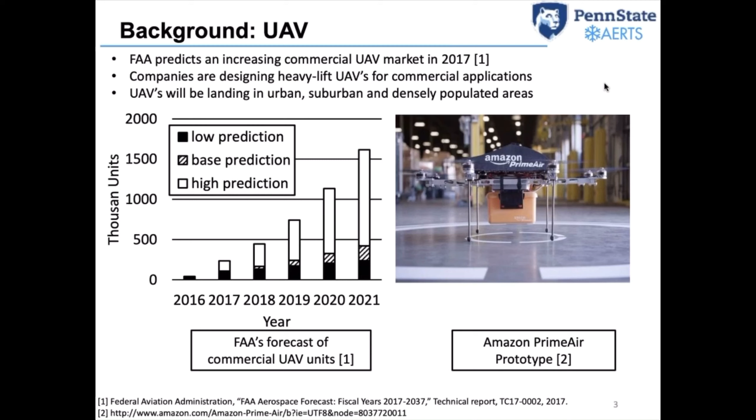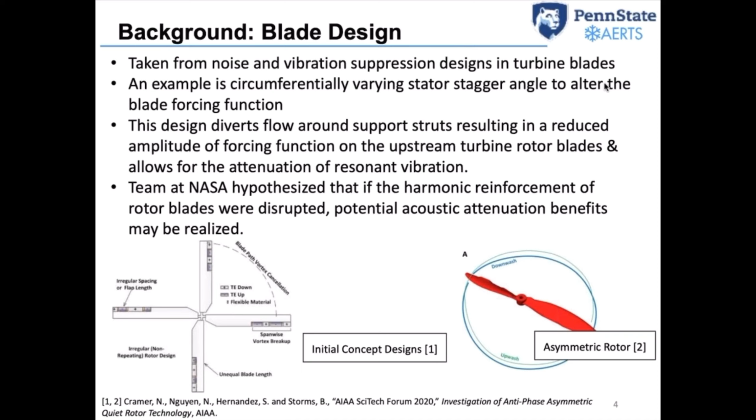Carrying over that drive to reduce noise, the team at NASA Ames developed multiple rotor concepts that reduce noise, taking inspiration from the turbomachinery industry. One concept is circumferentially varying stagger angles that alter the blade forcing function and allow for attenuation of resonant vibration. They hypothesized that if the harmonic reinforcement of the rotor blades were disrupted, there is potential acoustic attenuation benefit. Multiple concept designs were created and tested with CFD simulations, and the most promising design was then passed on to us to be tested at Penn State.

Our objective with this work was to experimentally explore the possible acoustic and aerodynamic performance benefits of these trailing edge modified blades which they had developed. We wanted to determine the acoustic behavior in hovering, in static air, and also in edgewise flight. We also wanted to get the thrust, the torque, and the combination of the two in another metric that we call inverse of power loading.

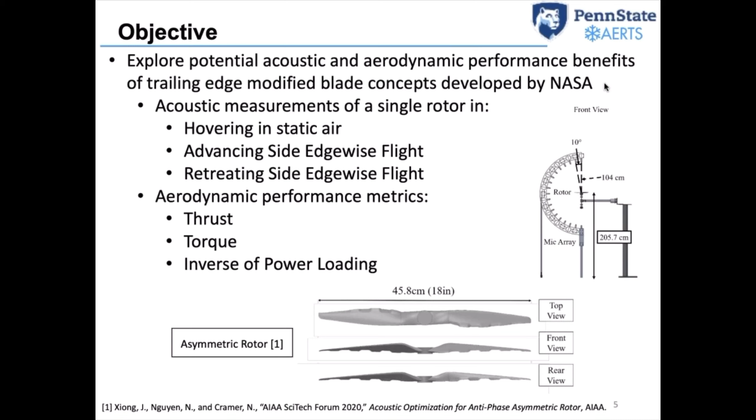In order to do so, we've developed our own test setup. You can see a picture of the asymmetric rotor, it's 18 inches in diameter. Our whole test setup was tested in our open jet anechoic chamber at Penn State.

We also constructed a 1 meter radius microphone array. This microphone arc was able to rotate on its post to allow the capturing of a 360-degree experimental acoustic sphere. The microphone array is placed at 90 degrees azimuthal location as defined in the picture on the right. Because of pre-existing equipment in the chamber, we are only able to test angles from 0 to 180 degrees.

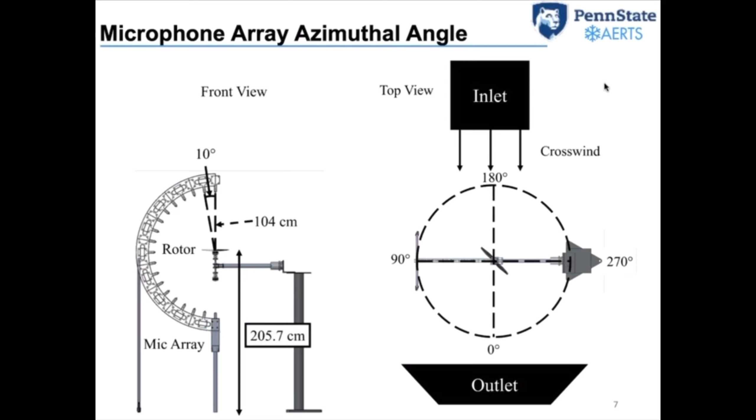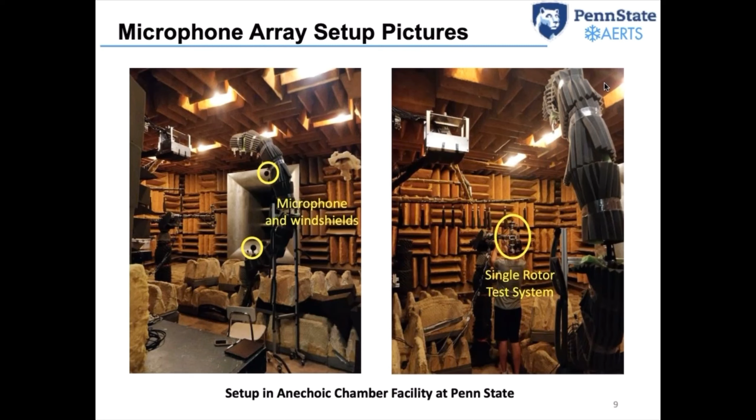We then populate our microphone array with half-inch microphones and windscreens at those zenith angles you can see. There were 15 microphones in total spanning throughout the arc. Here are some of the pictures of the microphone array being set up in the chamber. As you can see, it's quite big. And these are our sensors.

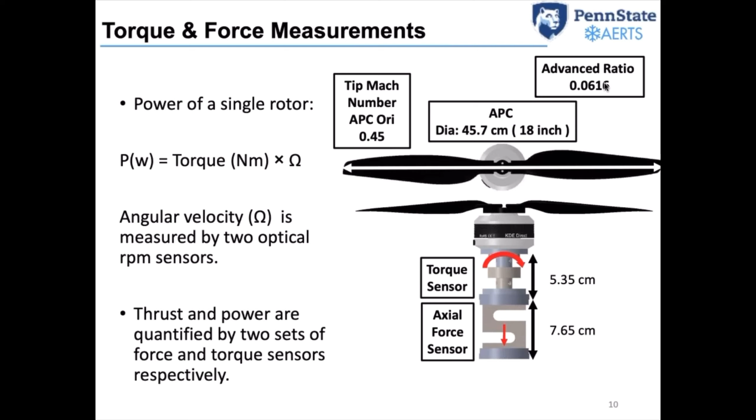We used thrust and torque sensors and also two optical RPM sensors to capture the RPM of the motor. Next are our blade types.

We tested 3 different blade types, or 3 different trailing edges. The baseline is one, and then 2 modified trailing edges, one called symmetric and the other asymmetric. For the symmetric design, the 2 blades have the same trailing edge shape, while for the asymmetric, one blade has a base trailing edge and the other has an out of phase trailing edge. We have 2 directions, clockwise and counterclockwise, and the counterclockwise is exactly the mirror of the clockwise blade.

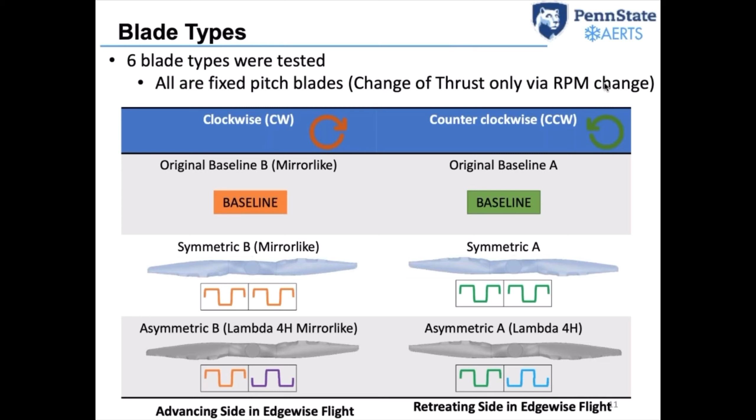A total of 6 blades were used for this study. All the blades are 3D printed using ABS material, and the blades are also fixed pitch, so we can only change the thrust values if we change the RPM. We tested two run conditions: hovering and edgewise at 9.8 meters per second.

The array is always placed at 90 degrees for this test. The clockwise blade we call the advancing side, because when it turns clockwise, the wind hits the leading edge first as it spins. The counterclockwise blade is called the retreating side, because the wind hits the trailing edge first when it spins.

If we superimpose both blades on one plane, the retreating side is as if we have another microphone array at the 270-degree location. We did this because we had a limitation on the angles we could test in the chamber. So these two blades allow us to capture the acoustic behavior at 90 degrees and 270 degrees azimuthal angles.

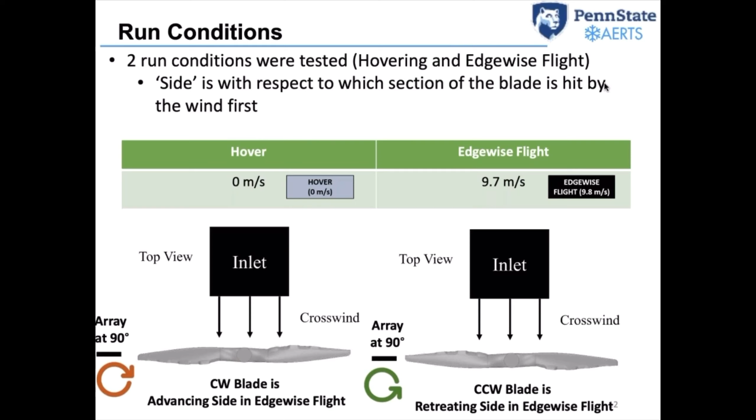It is noted that there are possible and multiple sources of uncertainty in our test. Because we tested two sets of the same trailing edge designs, one clockwise and one counterclockwise, it is important to check that these two blades are the same, both acoustically and in performance.

As explained earlier, if we put the real and imaginary microphone arc locations together in a side-view plane, the real one being 90 degrees and the other at 270 degrees, we get the picture on the right. So we have 2 points of comparison for the acoustics, at the axis of rotation. Ideally, microphone 1 and microphone 15 on both arcs should give the same value.

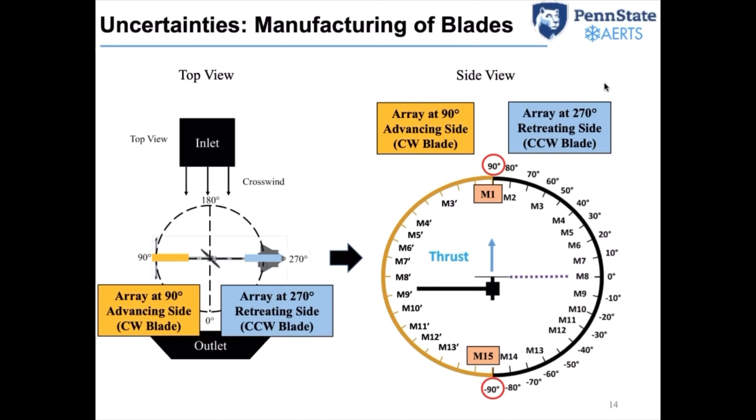We attempted to compare the OASPL values at these microphone locations. For hovering, microphone 15, at the bottom of the arc, was always saturated, so we didn't compare that. The highest discrepancy we saw was up to 0.3 dB in the matching RPM case, and 2 dB in the matching thrust case. I'd direct you to the paper for more details, but remember these uncertainty values.

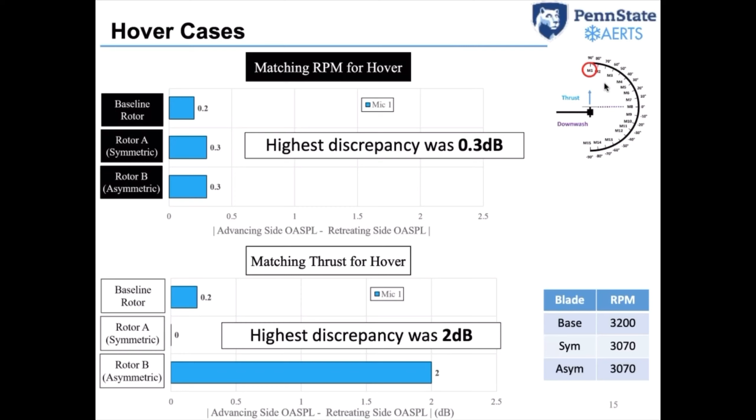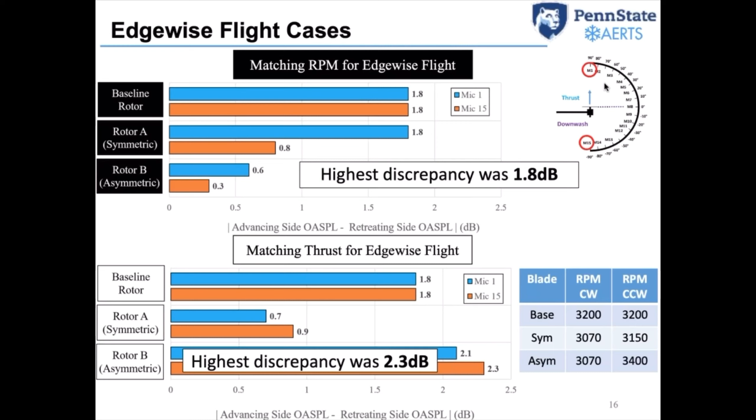We also compared the edgewise flight cases. Here the uncertainty was slightly higher: 1.8 dB and 2.3 dB. So it is identified that there are manufacturing uncertainties from the 3D printing that will affect our results later.

As we were testing indoors, an important aspect to pay attention to is recirculation. We're not the first to test indoors - NASA Langley, for example, has studied this issue in their facility.

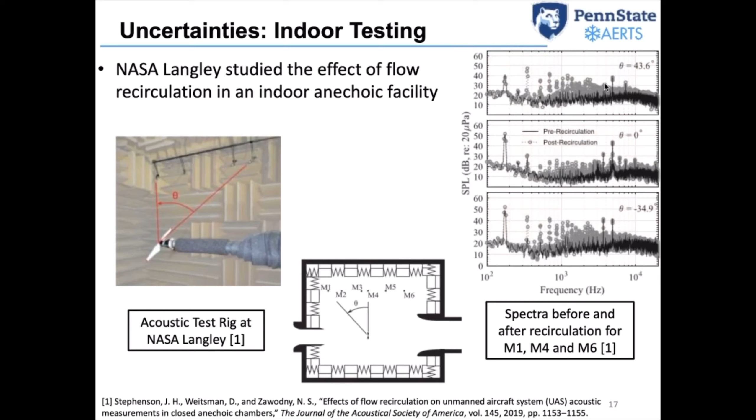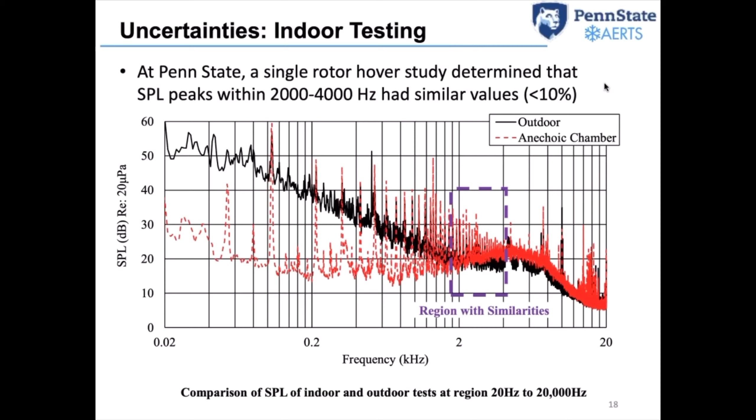At Penn State, a single rotor hover study was carried out to compare SPL values indoors versus outdoors. This study determined that the SPL peaks within 2000 to 4000 hertz had a region of similar values indoors versus outdoors, so we selected this region for our preliminary experimental characterization. Although recirculation is still an important issue, this study focuses on the deltas compared to the baseline blade. We also allowed 5 minutes between each test to let the facility reset.

Having all of that in mind, let's talk about the preliminary experimental results we determined from our new test capability at Penn State. There's a lot to cover, but I'll describe the performance, OASPL directivity, and the SPL results.

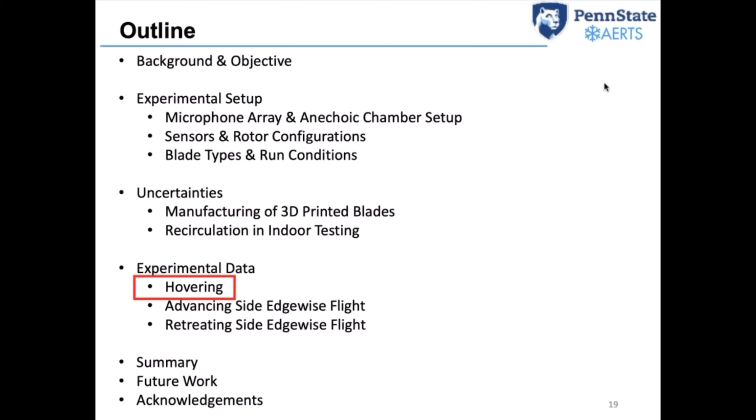We did two series of cases: matching RPM and matching thrust. Matching RPM is mainly to determine the performance benefits compared to the baseline design, while matching thrust cases are done mainly to determine the possible acoustic benefits.

First, let's look at the hover cases. We want to look at the thrust, the torque, and focus on the metric combining the two, which is 1/PL. 1/PL is 1 over power loading, so it's also thrust over power.

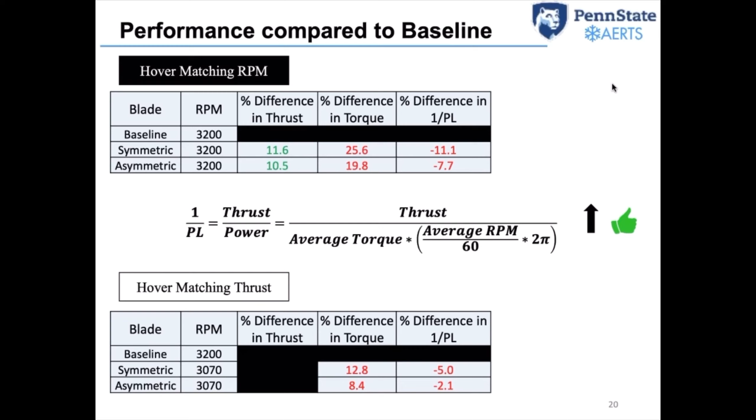Introducing these modified trailing edges, the symmetric and asymmetric design, we saw a thrust gain of about 10%, but also an increase in torque at the same time. Here we get a negative 1/PL value. The matching thrust cases also had negative 1/PL values, so there are not many benefits in performance when we introduce these trailing edge modifications.

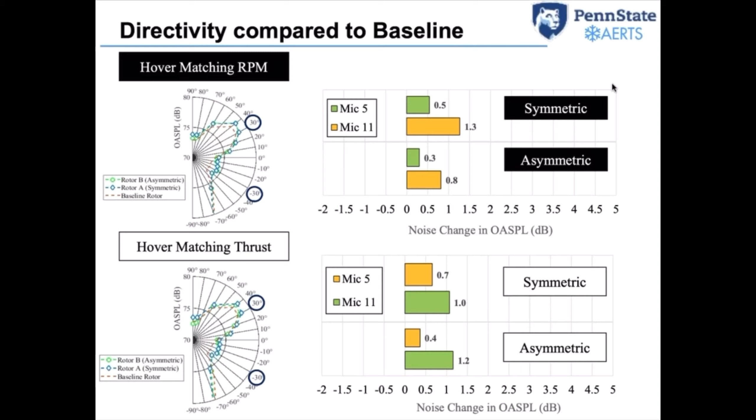Moving on to the directivity plots, the microphones near the bottom of the array are saturated because of the downwash blowing down, hence the picture as seen. Modified trailing edges in both matching RPM and matching thrust are actually louder in OASPL than the baseline blades. For hovering, the experiment doesn't show much benefit in acoustics or performance.

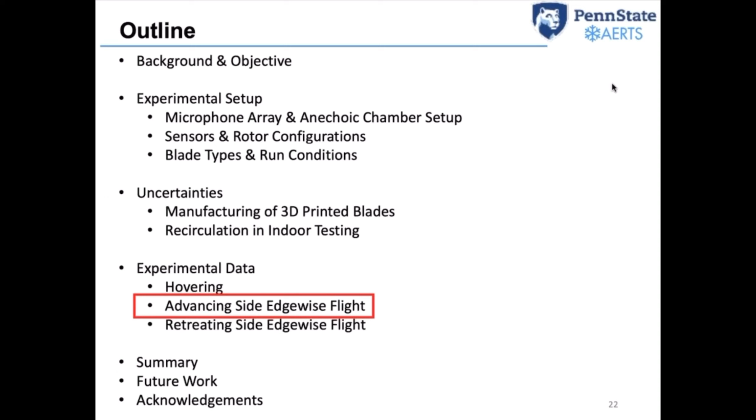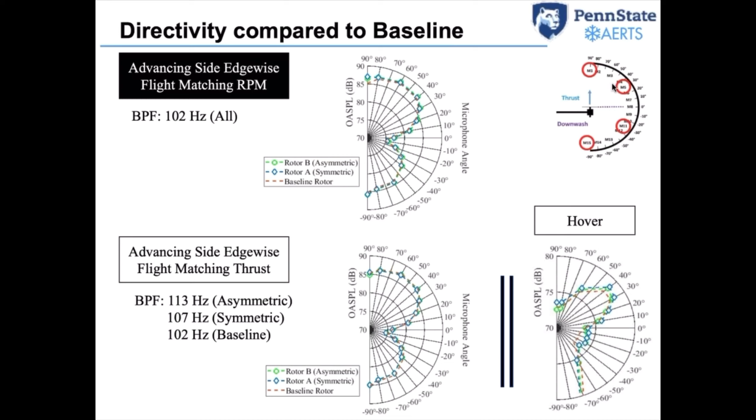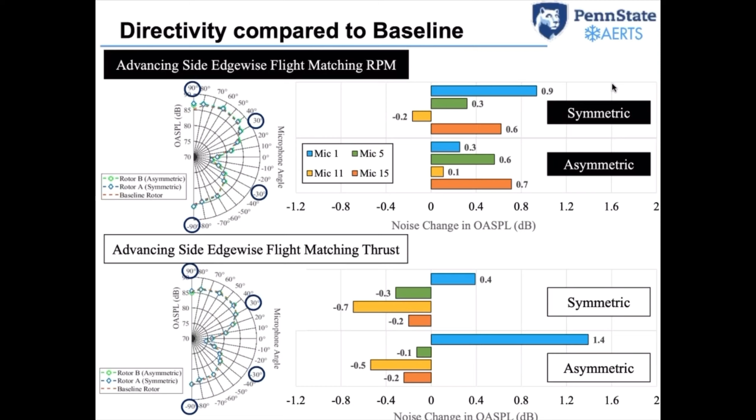Comparing to the baseline blades, most microphones in the matching RPM cases show no acoustic benefit. In the matching thrust cases, they show a slight benefit, but all of these are still within the uncertainty value, remember, 2.3 dB from earlier. So it's hard for us to make a conclusion because of that high uncertainty value from 3D printing.

Now let's take a look at the SPL comparison. This SPL comparison is done at the 30th harmonic of the BPF. We selected this harmonic as it is within the region of similarity in our study.

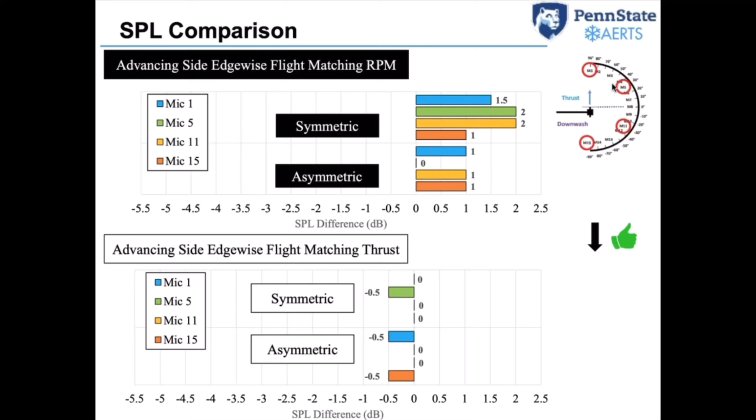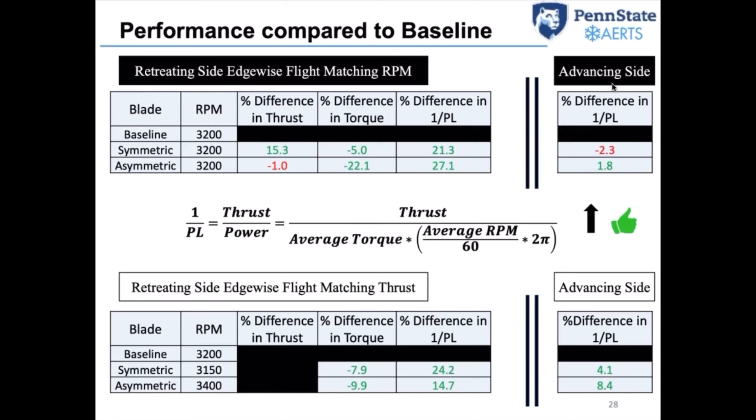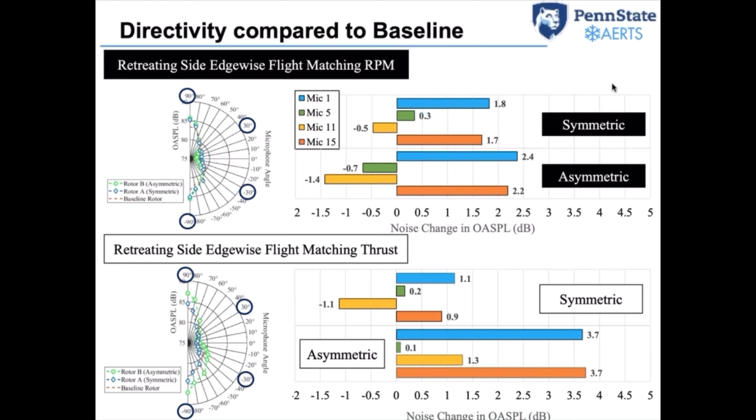That 3D printing is definitely an issue in our case. In the matching thrust cases, most modified blades show that they are louder than the baseline blades.

Moving on to the SPL comparison, this is where we saw the most potential benefits. The modified asymmetric and symmetric rotors were up to 4 and 5 dB quieter than the baseline rotor. Comparing this to the advancing side, this is very, very interesting. This gives us a reason to further look into this design in more detail in the future.

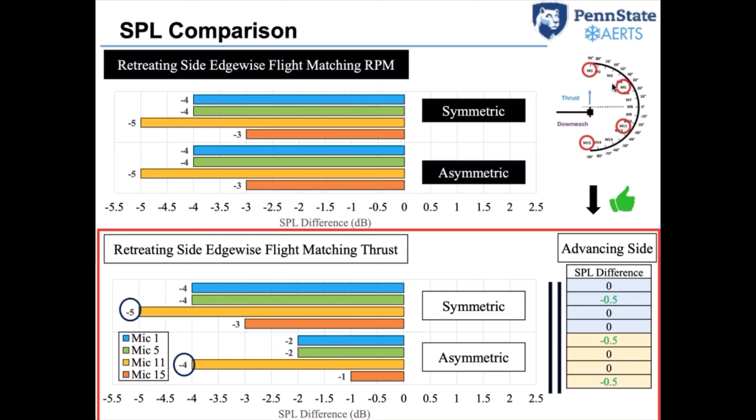As a summary, we've developed our own acoustic test system that is able to test new and novel rotor designs. From those, we are able to look at performance as well as the acoustic data. From our initial test, we saw that the performance and acoustic benefits of this asymmetric and symmetric modified trailing edge in hover are quite small.

We started to see more and more acoustic and performance benefits as we move on to the edgewise flight cases compared to hover. The retreating side edgewise flight cases show more possible benefits compared to the advancing side cases. Here we saw benefits in the SPL comparison at the 30th harmonic of the BPF of up to 4 and 5 dB. Even so, those gains are affected by uncertainty, especially from the 3D printing of the blades.

So although based on CFD, this concept of anti-phase asymmetric trailing edge modification and symmetric trailing edge modification continues to be promising, we can't make a conclusion yet from the experimental results. Further tests are planned to look into it more.

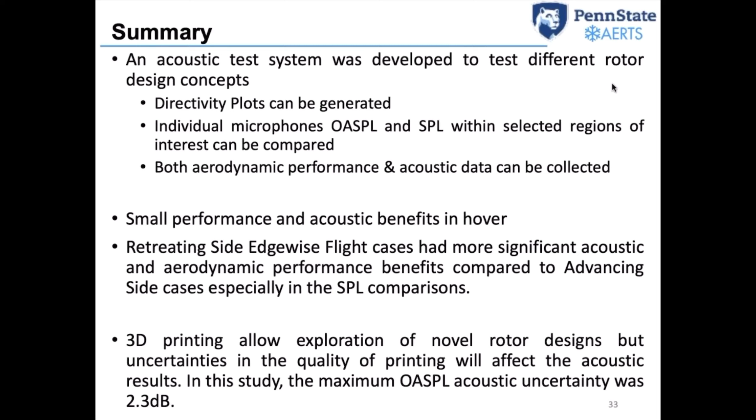We now have developed the tools to further test this blade concept, and the only thing to do is to repeat the test with tighter printing tolerances.

Building upon this summary, there are some things we plan and are working on. Number one is to improve the 3D printing of the blades. Number two is introducing more averaging and A-weighting in post-processing. Also, improvements in the test setup and understanding the facility better, such as the recirculation, and expanding the flight conditions tested.